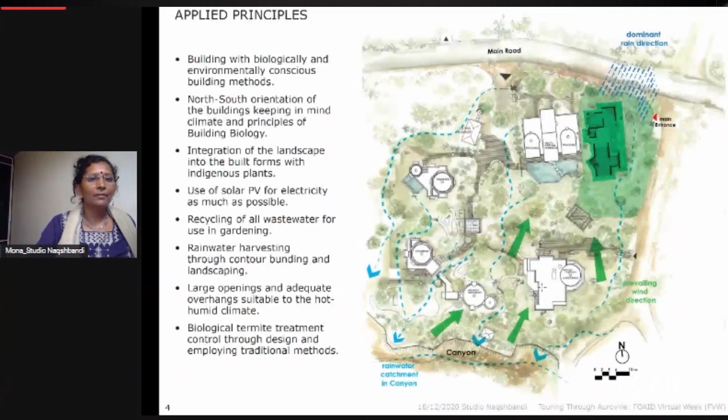Okay, doesn't matter. So this is located in the industrial zone of Auroville, and it was started in 1995 by our firm, and the idea was to set an example that the industrial zone doesn't have to be just gray and shut down after 5 o'clock, and it can be a livable, beautiful, harmonious environment with a combination of residential and low non-polluting industries.

The applied principles which we tried was to build with biologically and environmentally conscious building methods. We did north-south orientation, keeping in mind climate and principles of building biology. You can see on the screen the main wind direction and the main rain direction, which is northeast for us, and the wind direction southwest.

Then we also integrated landscape, which is a very important part of our practice, to include interior design and landscaping. And we wanted to keep all the existing trees, which were indigenous trees, on the site. So we planned around it. We used, of course, solar PV because we have a lot of power cuts, but also because it goes well with our philosophy. Recycling of all wastewater and use in gardening.

So we have a wastewater recycling system, which is biological. Rainwater harvesting through contour bunding and landscaping, because we have a canyon at the end. So we have to be very careful how we route our rainwater. And large openings and adequate overhangs suitable for hot-humid climate. And also we did a biological termite treatment, which I will show you later on some slides.

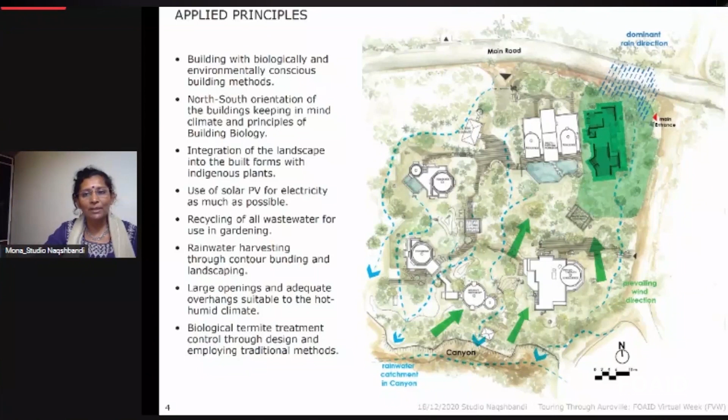So next, this is the studio. In the studio, we had wanted to use vaulting, as the whole of Yantra, the whole community that we had designed before, the idea was to create a landscape of domes and vaults. And we started with mud bricks, and some of them eventually are also made in burnt bricks. So these are all load-bearing structures. And they have a very strong connection to the landscape, as you can see. They also use, of course, local skills and materials.

So we're very lucky that in Auroville, all our building labor comes from the area around, and in the COVID times it has really proven itself to be of great value. We use all natural materials as much as possible. So rough black Cuddapah for flooring, ferrocement tables and cupboards for less maintenance and against termites, lime mortar and shell lime plastered walls.

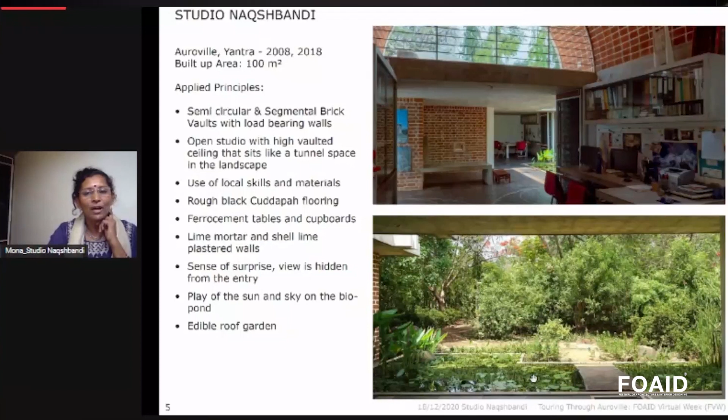Also, I like very much that our buildings are hidden; they are to be discovered, and they don't show you everything from the beginning. So we have a sense of surprise. Of course, there is the whole play of water with the sun, and we have an edible roof garden, which is very low tech and low maintenance.

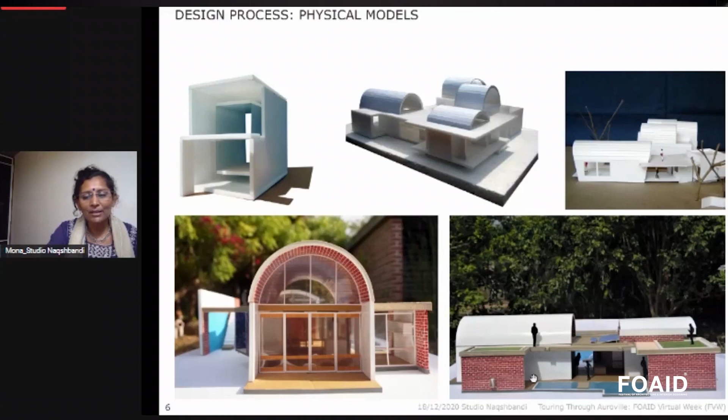So this is the design process. As many of you may know, one of the most difficult things is to design for your own self and your own studio especially. And you can see that I started with something very cubist and ended up with something segmental, vault, very different. I was also responding to what was there on the site already. And on the right hand side, you can see the final finished model with the extension.

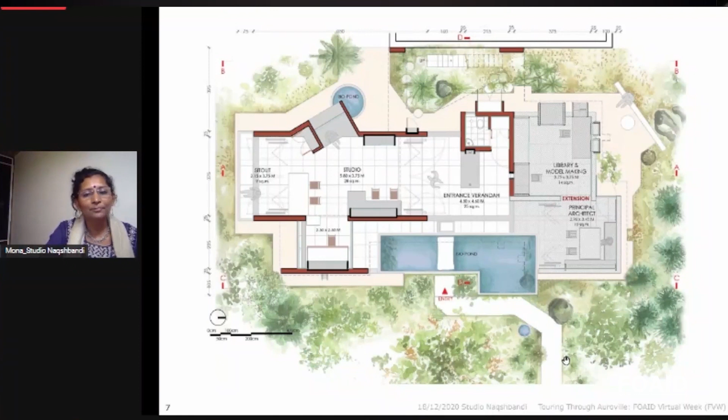This is the plan. It's a very simple plan. You have a kind of a linear vault here, and then we did an extension recently. So here we have a vaulted ceiling, which is a segmental vault, and the rest is a flat slab. So it's a combination of a flat slab and semicircular and segmental vault. So you can see the semicircular vaulting and the slab. Next.

And this is the extension that we created around the building. So in fact, it was a very nice experience because the extension made the building feel complete, which actually I hadn't planned. I just had some idea that I'll do an extension in future, but I never really felt that it would actually encompass the pond in such a way that it really makes it a very complete ensemble.

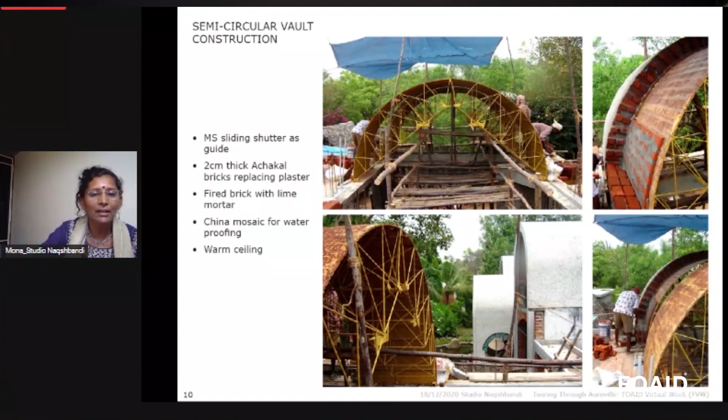Next. So this is the construction method for the semicircular vaulting. So you have a sliding shutter, and then you have these small, thin bricks, which we do because it also avoids plastering. It's easy to maintain, and we use China mosaic for waterproofing, and it lends a very nice warm ceiling, which hardly needs any maintenance. Next.

And this is the other one, which is the segmental vault. So here you can see the construction. It is also done with a sliding shutter, which I think Suhasini had also shown, how they have done. So it is a sliding shutter, which you slide every day, 1 meter, and then you get the next.

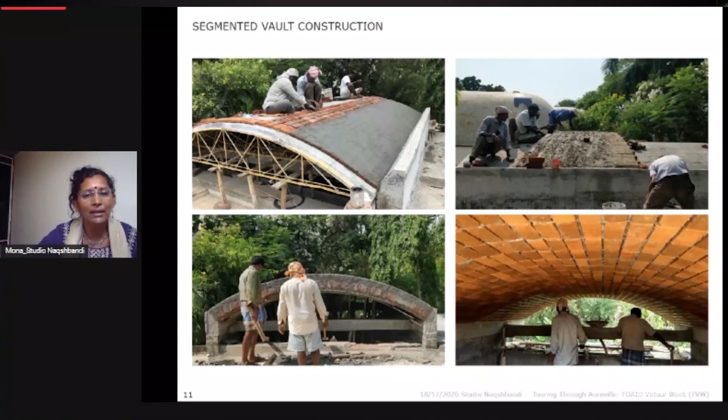After our skin and clothes, the building is where we spend most of our time, and especially where we work long hours or where we sleep are places where you should reduce electromagnetic fields as much as possible. And therefore, because we're made of water and we react to all these unseen fields, we have separated them. So we have a direct current, which is 12 volt, and another one which is 220 volt, and we combine these in the most optimal way, so it doesn't disturb your internal energies and your internal functioning. It's a very subtle thing. Many people will not believe in it, but we have enough examples that it works.

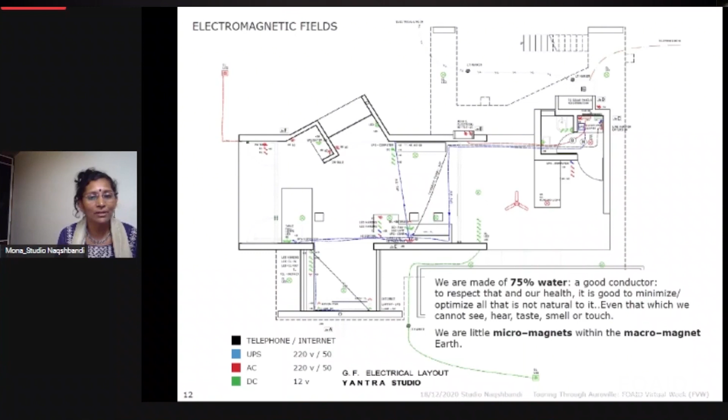Next. So this is another very important aspect, the light and shadow, and it's always amazing how this play of light works in the studio, especially when there's water and this high ceiling, which allows a lot of light to come in. So we don't need any sort of internal lighting, even on a cloudy day like this. It's only for a few hours that we would need light. Next.

And this is the staircase, which is a very minimal staircase, also designed so that it can be removed in case we want to move it somewhere else. This is fabricated in Auroville, and it leads to the terrace. Next.

These are some of the interior details. We like to do everything together. So in this case, the interior is done in ferrocement, and we have done a lot of detailing where we can design as per our needs, as per the lighting that is required. So it is all fitted in, which reduces overall maintenance in the long term and allows us to add some special personal touches wherever we want. Next.

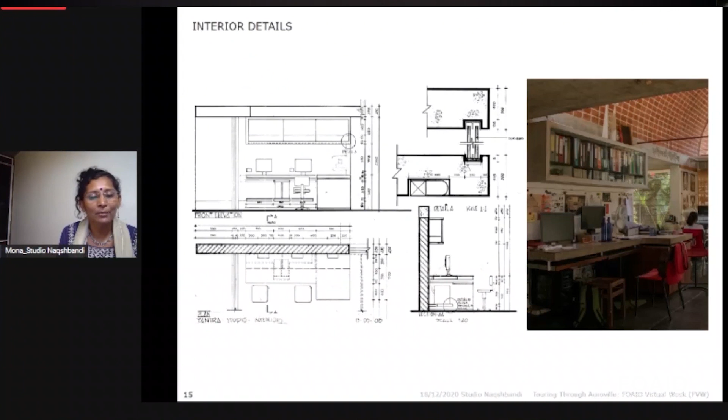And the doors are actually the most important part, because we wanted to have the possibility of completely opening or completely closing them, and have them mosquito proof, with glass but also security. So when you open the whole building, you're just sitting in the landscape. It's a barrel vault where you sit in the landscape with two sides open. And all these doors were fabricated locally with local workshops here in Auroville. Next.

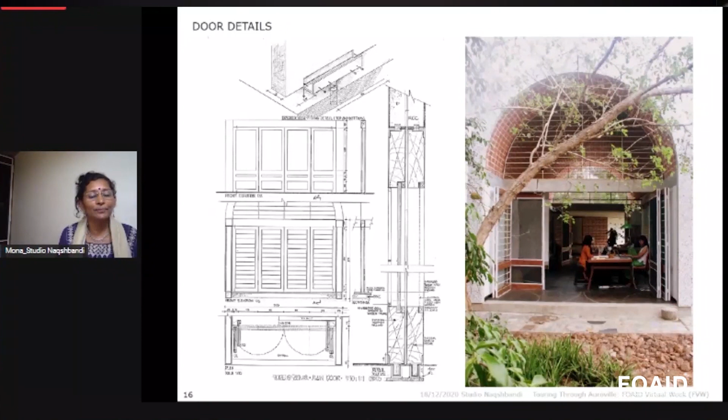So this is our anti-termite treatment, which we have used for 10 years; it works very well and uses no chemicals. We try not to use any chemicals which are detrimental to the earth as far as possible. And this one is very interesting because it's very simple. It's just turmeric, neem oil, and neem cake, which you mix into your plinth in the whole area around and inside, before you put your flooring and your BBLC or your brick bats or whatever you want below your flooring. It has proved to be extremely good, not expensive, and really works well. Next.

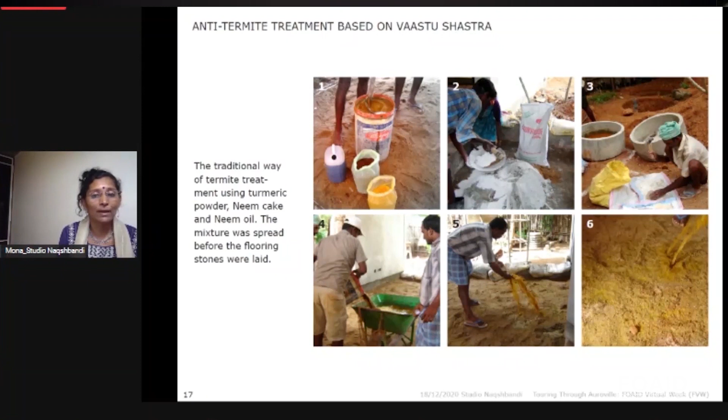This is also in our extension. We did shell lime plaster, but the whole building is done with lime mortar, which is made with kadukai seeds which are soaked, and then we mix it with the slaked lime, and then shell lime, which we make on site. We get the shells and keep them on the site for months, and then we mix it. And we did our own experiments because Chettinad plaster or other recipes are not always easy to make or easily available.

So we made our own experiments, and we figured out a very simple method of mixing just a little bit of white cement, a little bit of marble powder, and shell lime, and it really works great if you wax it. It's not as expensive as one thinks, and it's very easy to maintain. It keeps the building very cool. It's very hygroscopic, so in this climate it works really well. Next.

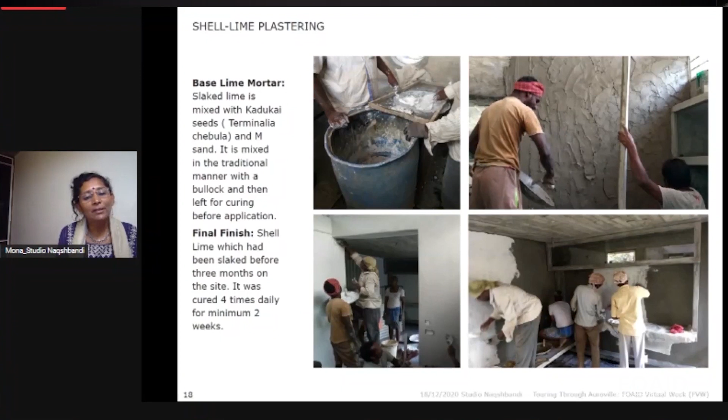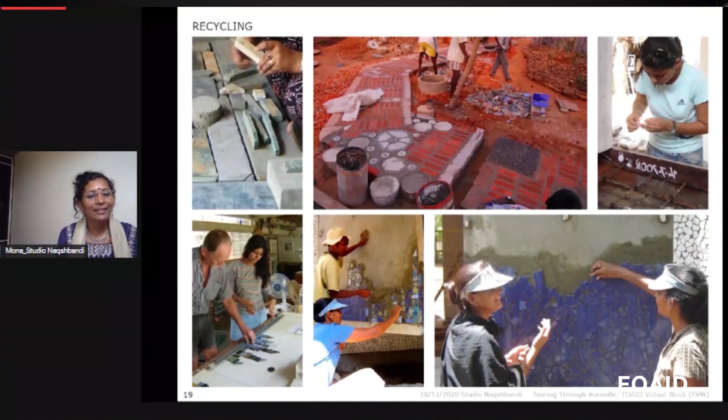These are some of our recycling. Our aim is that when we leave the site, there should be zero waste. So we reuse almost everything. All the waste on the site is reused. And we also reuse from other places around; potteries in Auroville are happy to give us some of their waste, and we reuse some of that. At the end of the day, for all the cement mortar that is left, we create precast molds so that we can use it in the landscaping, and we really have fun with it at the same time. Next.

So landscaping, like I said, is a very major part of our practice, and we enjoy doing it. And I think that is like the cream on the cake. This is what actually makes the building sit in the landscape. And sometimes I really wonder that people can do buildings but don't do anything around it, and it's like a building that has landed but hasn't actually found its feet.

So these are some of our ponds. As you can see, they are bio ponds. They are used very nicely. They don't have any kind of mechanical system, and you can see the clarity of water. It is just with fish and with the plants. So no mosquitoes. They don't have mosquitoes because there's fish and they eat all the larvae. Next.

And this is our low-tech, low-maintenance edible green roof, which is made very simply with only things around it, and it is made after the building is finished. So there is no question of leakage. It's put on top, with only 10-15 centimeters of soil, which is just made from leaves and waste soil around topsoil.

We've been growing fruits and vegetables for 10 years, and it is mainly like a small prototype to showcase that it's possible to convert every little balcony or terrace into a green roof with very low maintenance. Next.

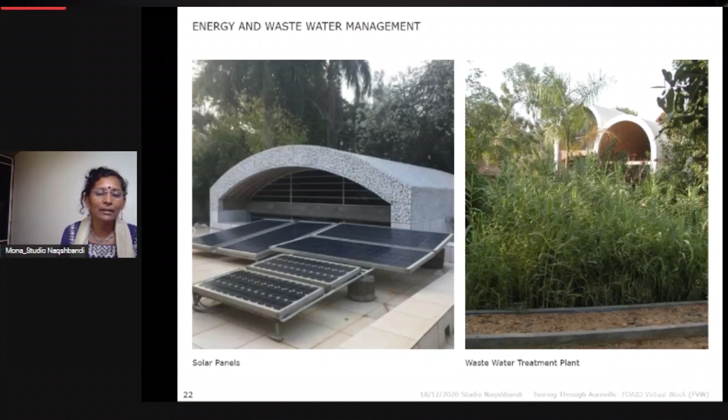This is a small thermal comfort survey we had done. So we had done a 5-year research in the Indo-US treaty, which was for passive energy and design. I was part of that group for 5 years, and on the side we had just done this little thermal comfort survey of this studio, where we measured in June and July, which are not very comfortable months in our hot, humid climate.

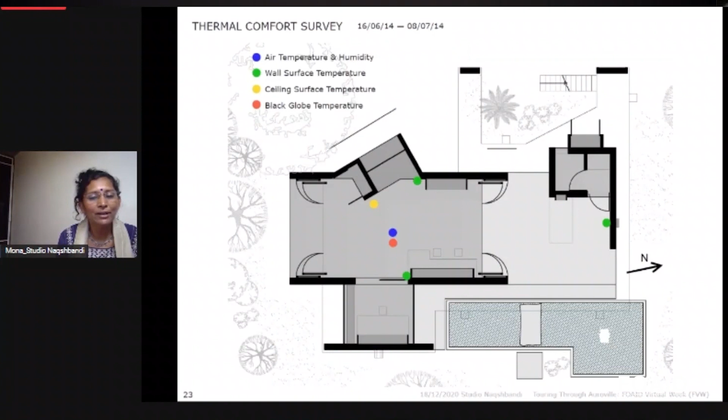And we had put thermal sensors and wall surface temperature, and we were measuring. Next slide, please. And then we did a PMV, which is called the predicted mean vote. So we had 50 survey statements from the people who were working in the studio. They are monitored for the clothing they're wearing and the activity they had before, and then they tell you whether they are feeling comfortable, from cool to hot, with 6 different variations in between.

And then you mark it on the psychrometric chart, and here you can see that most of the measurements are outside the psychrometric chart. The psychrometric chart also includes if you have your personal fan, because we have no fans in the whole studio, but we have small personal fans for people so everybody can determine on their own what they like.

And even though all of these measurements were outside of what would be the normal prescribed comfort zone, most of the occupants, as you can see in the green chart on the bottom left, said they were slightly warm or neutral rather than really hot. So actually it proves that what is prescribed and what is actually adaptive is very different, because human beings adapt.

And now there is a new standard in India, which is called IMAC, India Model for Adaptive Thermal Comfort. And what it says is that you have to see what the outside temperature is, and then accordingly decide the inside temperature. There is no fixed temperature which is comfortable, which used to be the case some years ago. So this was part of the research conducted over these 5 years with the Indo-US Joint Energy Program. Next.

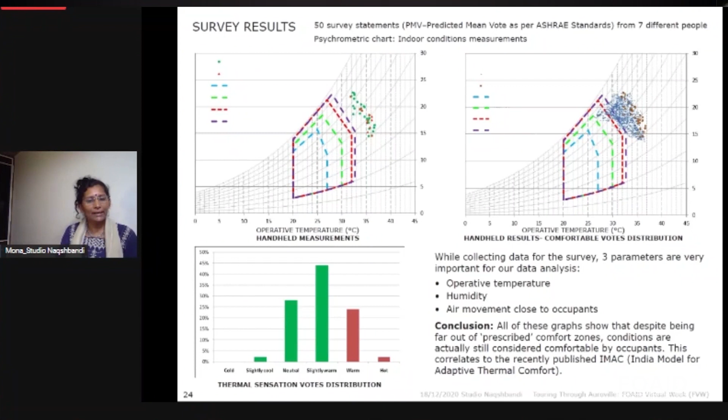And on this very tight corner plot, 7 meters by 12.5 meters, we were asked to design an apartment for a family in 3 different sections. So basically every apartment is independent for their son, their daughter and the parents. And it was a completely east-facing facade. So what you see is the east-facing facade.

And because in Auroville we enjoy a lot of space, we are often told, you work in greenfield sites, you have so much space. Even just storing materials becomes a problem on a location like this. So that's why I included this project. We tried to see how we can put the principles that we follow in Auroville in our practice there also, without compromising. And of course, this has to be an RCC frame structure.

It was very tight, and this is a very heavy road which is on the canal, on the main roads of Pondicherry. So we used aerocon blocks for the courtyard wall for insulation, for acoustic insulation. And we have a courtyard, we have a pond in it, in that small space we managed, and it's naturally ventilated, doesn't have air conditioning except in the bedrooms. And it has this green wall, and of course it's as energy efficient as possible in this kind of context. Next.

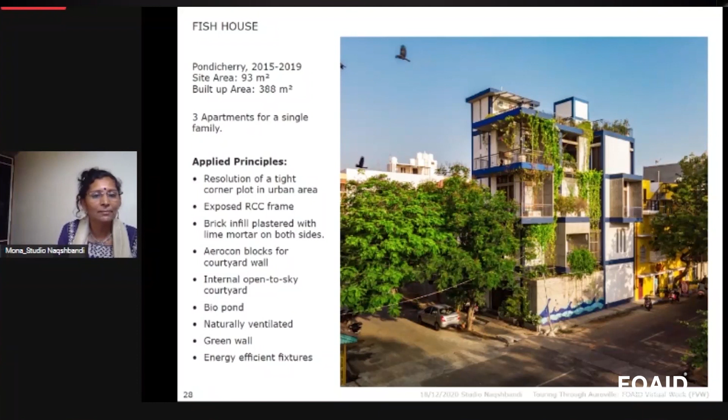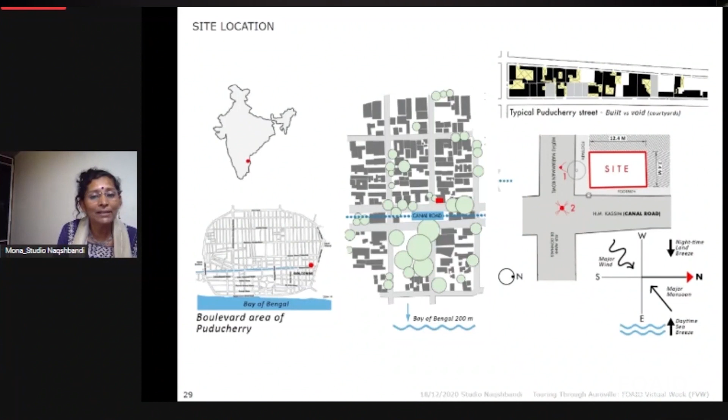So this is the location which I just described. We studied a lot of the housing in Pondicherry because Pondicherry doesn't have setbacks in the old boulevard area, and it's very nice how people have introduced small courtyards to take care of their ventilation, because they're back-to-back housing and small plots with 6-meter frontage, and it can go till 20-30 meters. So how do you create ventilation in that without losing space? Next.

So this is a view from the building, how far it is from the coast, from the Bay of Bengal, from the sea. Next. And this is the location on the other side. We were very lucky to have a corner plot with an opening in the front. So this is a very prime location, I would say, in Pondicherry. Next.

So this is how we resolved the plan. It has a small pond, which is just 1.1 meter wide, and it has a small thin courtyard, which is also 1.2 meter wide. But between the two of them, they create this amazing effect, not only of ventilation, but an inward-looking cocoon, because the ground floor was meant to be a meditation space for the parents and for their friends and their guests. So it was a very cocoon-like space that is created on the ground floor.

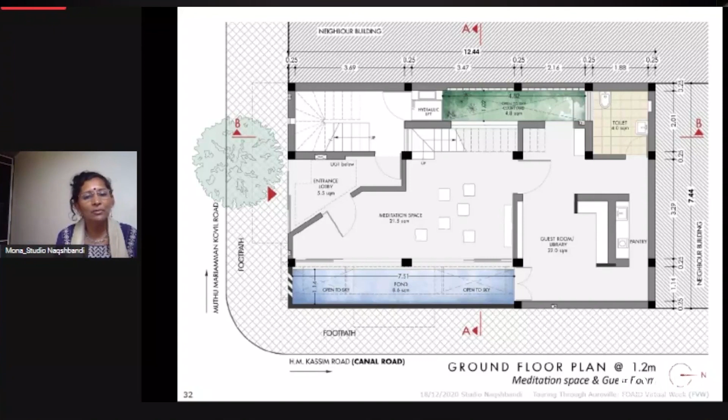And then there is a kind of duplex to the first floor. And all the bathrooms open into this courtyard, so it has natural ventilation. And as you can see, at the entrance, all the circulation is resolved in that little corner with a lift and staircase. So it requires minimum space. It was very tight planning, but works very well. Next.

And this is the section that we worked on. On the right-hand side, you can see the small courtyard allowing for light. And as we go up, we have set it back a bit. And on the front, you can see the little pond in the ground floor. And each room has a balcony. So every living room and bedroom has a balcony. Next.

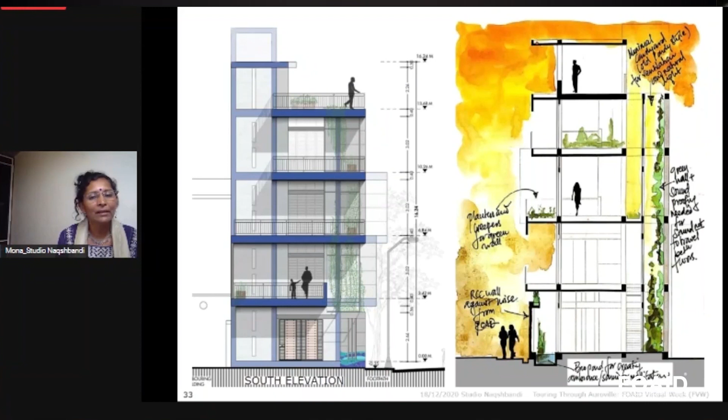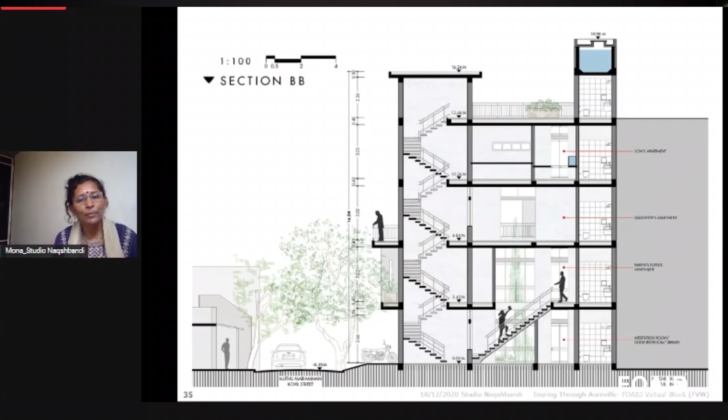And we did our little mural at the bottom, because this was mainly a strategy so that people will not use that space to pee, which is very common, or even to sleep. So we have used another kind of finishing on the ground so that it's very rough for them.